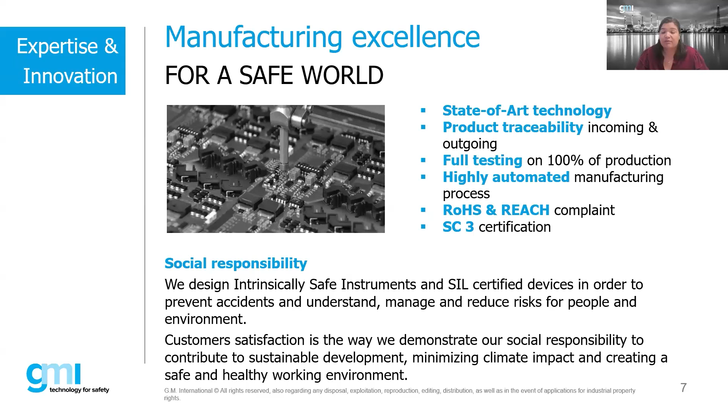We follow all the standards, like I was mentioning. We're an Italian company, so we follow the European standards, ATEX, but we are an international company, so we follow IECEx, and we are in North America, so we also follow the North American standards.

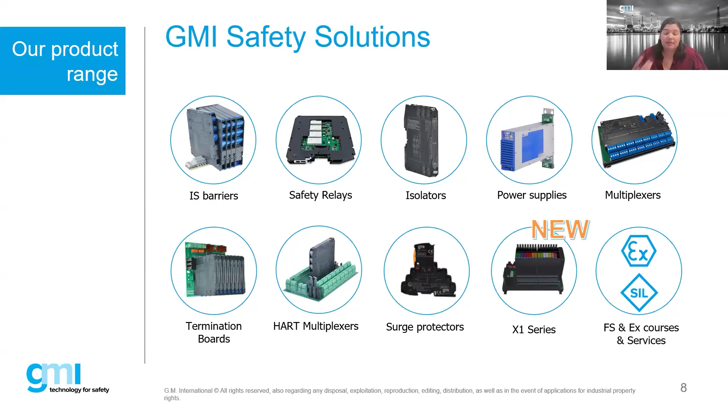We're located all over the world, so there will always be someone from the GMI team in your time zone. I know that's very important for our users, for the user experience. Some of our customers that we've had the pleasure to work with in the last 30, 40 years from the company include system vendors, EPCs, OEMs, and of course end users.

So there you go, now I pass the microphone to Bob Johnson so we can start the technical training.

Okay, well thank you Barbara, and thank you for sharing a little bit about GMI. I do want to share this on a personal note - I've known the folks from GMI for many, many years, and we also supply Ex equipment as well. One of the things I've always really enjoyed working with GMI is I can talk to pretty much anybody within the organization and they respond very quickly, and that's a nice thing. It started off as a family-owned business, and many of the original family members are still part of the organization. It's nice to actually be able to pick up the phone, talk to somebody, and get an answer. Unlike some of these other faceless, nameless large corporations, they're very easy to deal with, and getting answers is always usually very easy.

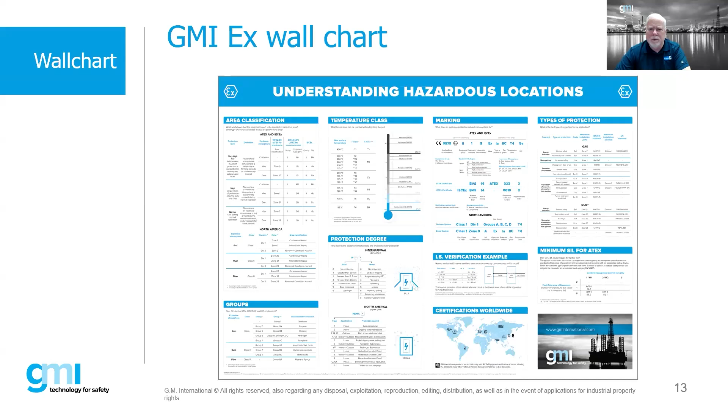So going through it a little bit, starting with area classification - this is always a question people try to figure out, which standards do we use for area classification? Within the international world, we pretty much follow the 60079-10-1 and 10-2, depending on whether it's gases or dusts. Sometimes we'll also use what's called the Energy Institute of Petroleum 15, which is an area classification document. Then in the United States and some parts of the world, we'll follow what are called American Petroleum Institute recommended practices, specifically the 500 and 505, or an NFPA document.

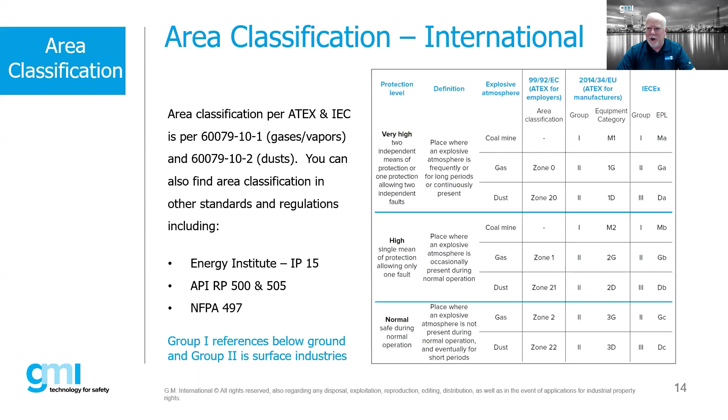Looking at this chart, when we talk about groups and zones, anything under ATEX where you see a group - group 1 is considered a mining application, group 2 is considered surface industry. Within your wall charts you'll see a definition talking about the protection concept of equipment suitable for those particular areas, either very high, high, or normal fault condition tolerant type product. We furthermore break this down into M1, M2 for mining, then surface equipment groups 1, 2, or 3, and then a G or D for gas or dust hazards.

That's kind of the ATEX marking requirements, where under IECEx we have 3 different equipment groups called EPLs, and these are considered to be either 1, 2, or 3. It's either a GA, GB, or GC, depending on the zone of use.

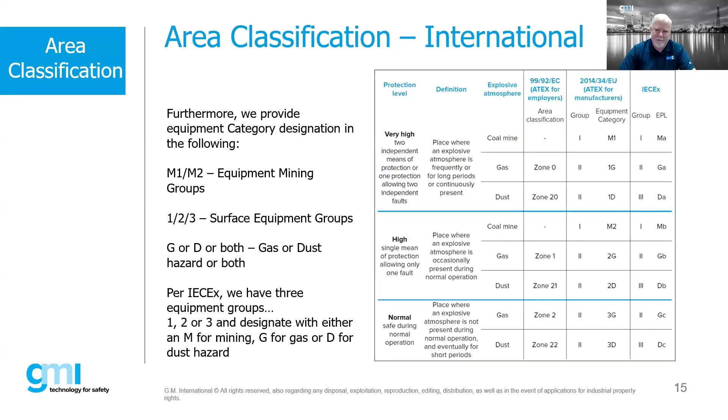Yikes. Apologize, Barbara, I might have to have you take over here a little bit if I can't get over this.

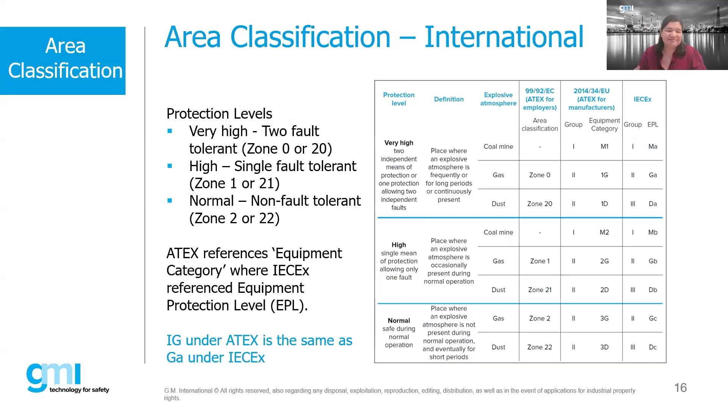Anyway, what we're going through here again, we have some additional information. ATEX will reference the equipment category, where the IECEx references equipment protection levels. So the key thing to note on this, where you see something that says ATEX category 1G, that basically means the exact same thing as GA under the IECEx scheme.

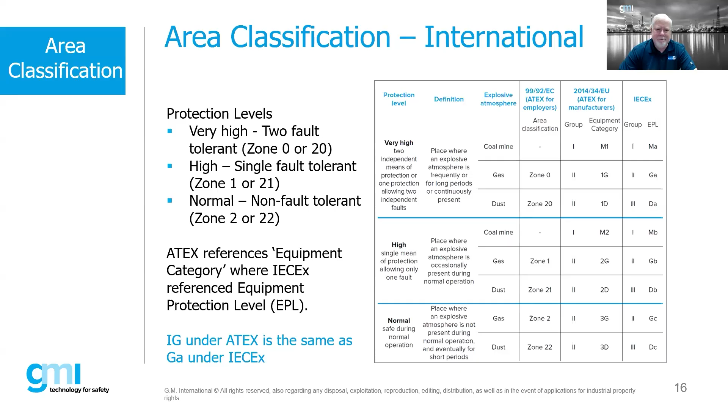Now, for division applications or North American applications, we in effect have 2 different methodologies that we can follow. In the US, the legacy was more or less defined within the National Electric Code as Section 500. For the zone concept, we use Article 505, which is the zone concept.

So in the US legacy facilities, we would have either a Division 1 or a Division 2, and we would have a class hazard. Class 1 would be gases, Class 2 would be dust, and Class 3 would be fibers. And how this kind of breaks down in comparison to the zone concept, a Division 1 area in the United States would be a combination of Zone 0 and Zone 1, where a Division 2 is very much similar to a Zone 2.

So let's do a quick poll question. This will allow me maybe to go grab a little water, and I'll be right back. Can you launch the poll? I think you have access to the poll. Well, you know what? We'll skip that, how's that?

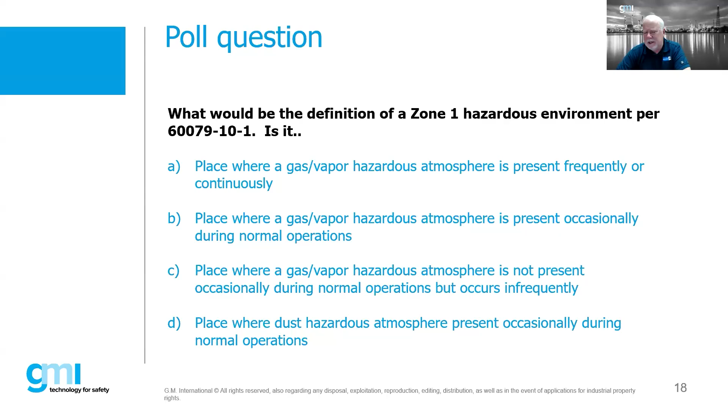The answer for this, a Zone 1 is an area in which a gas vapor hazardous atmosphere is present frequently or continuous, or in normal operation. It's not D. Where gas vapor atmosphere is not present occasionally but occurs infrequently, it's not C. B would be the correct answer: place where a gas vapor hazardous atmosphere is present occasionally during normal operations. If it's frequently or continuously, we consider that to be a Zone 0 environment.

So why do we subdivide these gases and vapors? We need to determine this based upon really a couple different things, the main factors.

Yes, sorry Bob, let me interrupt you there. We have a question that I think will be a good time to talk about it.

They're asking, may you please explain the meaning of class in North America classifications? In North America, we have Class 1 and Class 2, and Class 3, when we talk about the type of explosive atmosphere we have, right? Which will be gas, dust, or fibers. When we talk about zones, that's when we have like Zone 0, 1, 2, which is gas, 20, 21, 22, which is dust and fibers. So that's how in North America we recognize what type of explosive atmosphere we're dealing with.

This slide kind of explains a little bit about that. Class one, division one, that's a gas hazard. We would consider that either a Zone 0, Zone 1, or Zone 2. If it's a dust hazard, then we consider that a Zone 20, 21, or 22. In the IEC world, we don't segregate dust and fibers into two different classes like what we do in the US, we lump those all together, considered to be dust and fiber hazards. So in the US we've broken that out, and that's a little bit different.

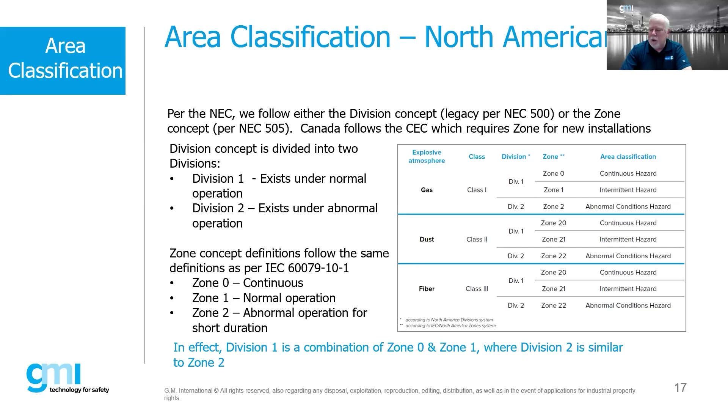But if anytime anybody mentions a class one area, I apologize, a class one area is a gas vapor environment.

So some of the gases will then get subdivided. It's important to do this because we need to understand when we get into protection concepts, what are the key criteria, depending on the protection concept, how we address these particular gases and vapors. It could be based upon the pressures, it could be based upon the minimum ignition energy, it could be based upon the temperature codes, which we'll talk about here in just a second.

So in the US, we subdivide into 4 different gas groups: A, B, C, and D. In the IEC world, we have 3 different gas groups.

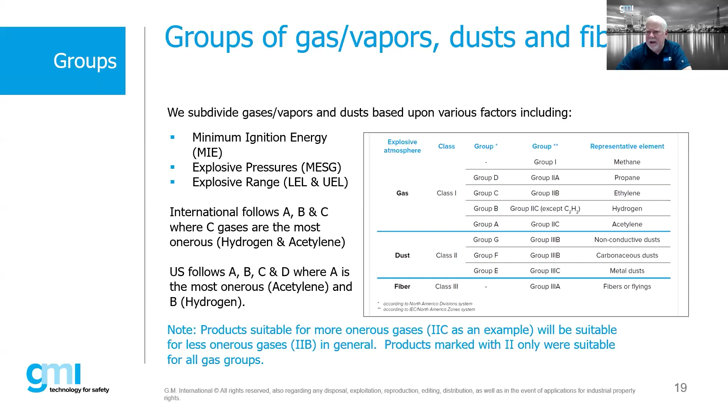So we lump hydrogen and acetylene in the same gas group in the IEC world, whereas in the NEC world we keep hydrogen separate. All the other gases and vapors you'll find in industry generally fall into either a 2B, 2A, Group C, or Group D gas. We do something similar with dusts, which we call Group 3, subdivided into 3C, 3B, or 3A. So in many cases there are a lot of similarities, we just call it something different here in the United States.

A little bit about ingress protections. We had a question come up regarding IP ratings and NEMA ratings. NEMA stands for National Electrical Manufacturers Association, and they've published a document that's been around for many years called NEMA 250.

This document basically defines ratings for enclosures, and you'll see ratings ranging anywhere from a NEMA 1 to a NEMA 13, with a whole list of different classifications.

In the international world, we talk about IEC ingress protection codes, which are based on the 60529 standard. The big difference is that NEMA ratings also include testing for corrosion resistance, whereas IP codes do not. IP codes just strictly test against either solids or liquids, where NEMA ratings also ask about the corrosion resistant characteristics of the enclosure. So that is a difference.

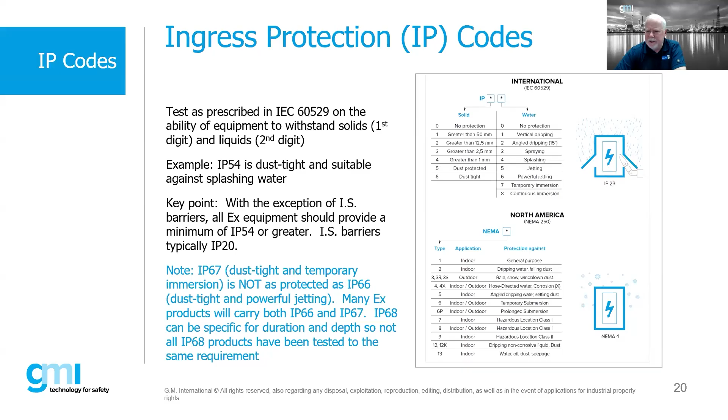The important thing to note here is some people will ask, can I just use a NEMA rated box for an international application that requires an IP rating? I would always tell them I wouldn't do that. They do overlap, but it's a different testing procedure. The same holds true in the US - if you're doing a US installation, I would use a NEMA rated enclosure as opposed to an IP rated enclosure. In many cases, enclosures from big manufacturers will have both, so just be aware that that's a requirement for enclosures.

Now, temperature codes is another area where we're slightly different on the international side versus the United States, but it's the same concept. In the international world, we have six temperature codes associated with this - what's called T1 through T6.

In the United States, under the legacy division concept, we introduced intermediate temperature codes. So in addition to maybe just a T2, we would break it down even further to maybe a T2A, T2B, and so on.

The whole concept with temperature codes is that every flammable gas or vapor will be assigned a temperature code. What that temperature code means is that if we have a product rated, for example, a T3, that means the gas will ignite at a temperature somewhere above 200 degrees C. If we have a T3 rating for a particular product, that means the relevant surface temperature on that product will never get to that point.

So we have to take into account temperature codes when selecting product. But before we select product, we have to identify the temperature codes associated with the ignition temperature of the flammable gas, to make sure from a heat standpoint that our products will never reach the point where we could have spontaneous ignition of the flammable gas.

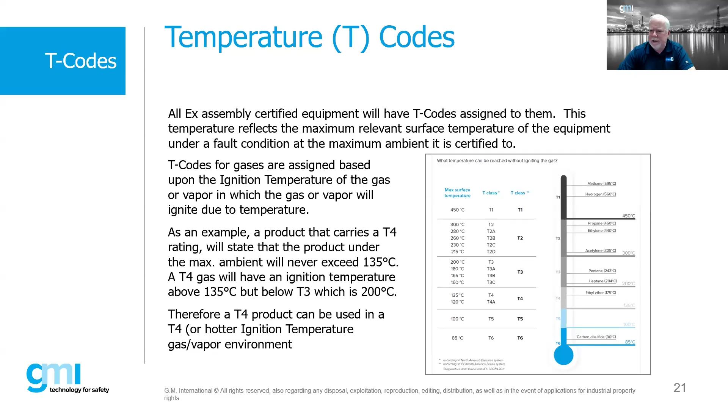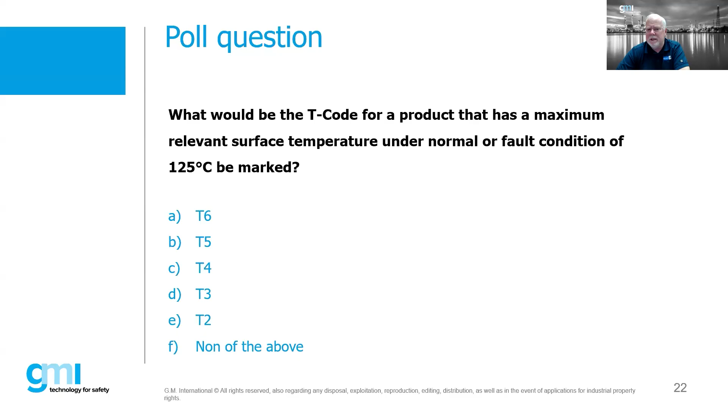So let's look at an example: a T code for a product has a maximum relevant surface temperature under normal or fault condition of 125 degrees. The T codes are T6 is 85, T5 is 100, T4 is 135. In this case, the product's relevant surface temperature is 125 degrees C, which is below 135 degrees C, the T4 rating. So we would mark this product with a T4.

So now we get into part of the wall chart where we start talking about the protection concepts and the standards and the suitability of these particular products. When we think about the protection concepts, in particular for gas applications, there's really four major concepts, and we break it down into this.

Energy limitation, like intrinsic safety, where we're limiting the amount of energy. Non-sparking, where we have no arcing or sparking, but we have to make sure on creepage and clearance distances - we'd call this increased safety. Containment, where we're taking an arcing and sparking device, putting it in a cast enclosure, containing that explosion inside so it doesn't propagate to the outside. And then finally, separation, where we're removing the gas from any potential ignition source by the use of maybe pressurization, oil immersion, and so on.

For dust, we basically talk about energy limitation, again intrinsic safety, or separation - dust ignition proof, pressurization, and others.

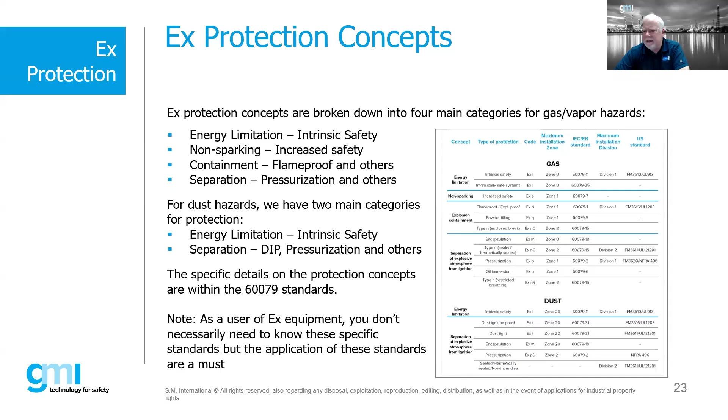So if my role is product development or product engineering, absolutely I need to understand those standards. If my role is more about applying these particular products in a design system, I don't necessarily need to know all these details, but I do need to know some of the other ones that are published.

So just as an example, we're limiting the amount of energy below the minimum ignition energy for the particular gas group. This is typically the use of intrinsic safety, and it's divided up into three ranges of fault tolerance, called EXIA, IB, and IC.

So when we looked at the wall chart where it talked about fault tolerance, the highest level of intrinsic safety is double fault tolerant, meaning we could have two separate individual faults of an intrinsically safe circuit and still be safe for use. If we have an IB circuit or an IB barrier, in an IB loop, that means we can only have a single fault, and that's only suitable for zone 1. If it's not fault tolerant, meaning there's no redundancy, then typically that's only going to be suitable for zone 2.

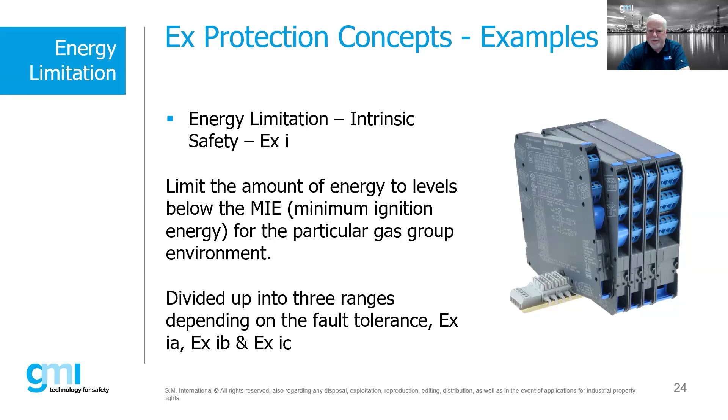Non-sparking - a good example of this is increased safety enclosures, where as long as there's no arcing or sparking taking place on the inside of this enclosure, we can assume gas vapors get on the inside, but since there's no arcing or sparking, enclosures manufactured of sheet metal, plastic, or polyester are perfectly suitable for those applications.

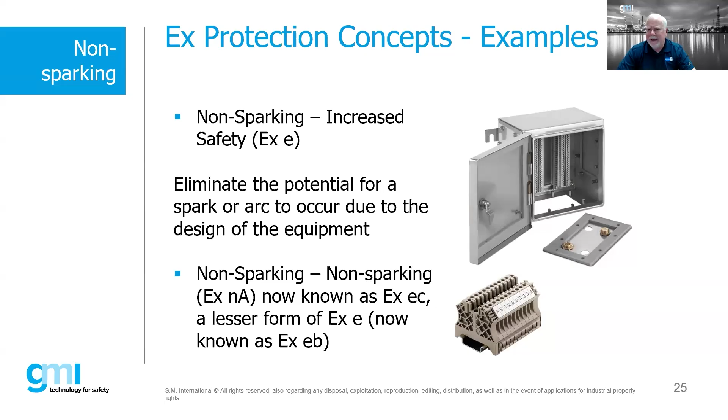So typically what we do need to do is make sure the only items we put on the inside of these enclosures are certified in and of themselves. A prime example is terminal blocks, but we could have relays, switches, different components that will all have an individual EX certificate. Depending on the manufacturer and the certificate, these can all be used inside of these enclosures. However, the important thing to note is we have to validate and make sure we don't put anything in those enclosures that isn't listed specifically within the certificate.

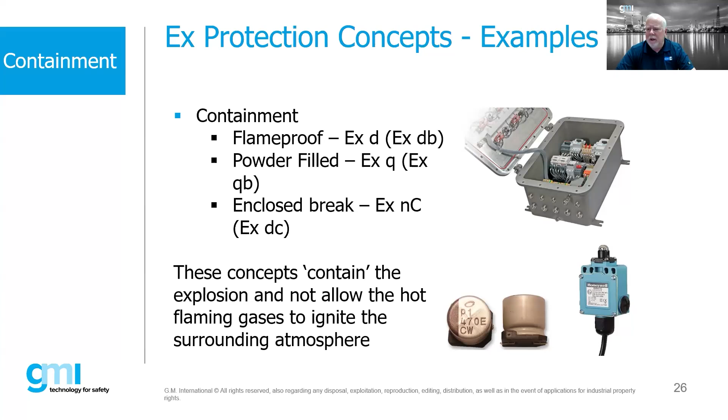Then some of the other protection concepts of containment - many people are familiar with flame-proof, but there's also what is called powder-filled and enclosed break. Powder-filled is where maybe we're taking a switching device, or a PC board, and encapsulating it with a very fine quartz powder - that's considered EXQ. Enclosed break might actually be a small switch enclosed within a housing. So that's containing the explosion and not letting it propagate to the outside atmosphere.

And then finally, our separation - we could do it in different ways. Encapsulation, where maybe we're taking a printed circuit board and encapsulating it in a resin - you might find solenoid valves as a prime example used in the industry. Hermetically sealed - some switches are actually considered hermetically sealed, they're gas tight. What's very common is pressurization, so we have different pressurization techniques for different zones.

We can also do oil immersion, where we're taking any arcing device and immersing it in an oil bath. And then finally, we have what is called restricted breathing, where we're restricting the gas-air mixture from entering the inside of either an enclosure or a light fitting or something like that. So again, we're removing the gas flammable mixture from the source of ignition.

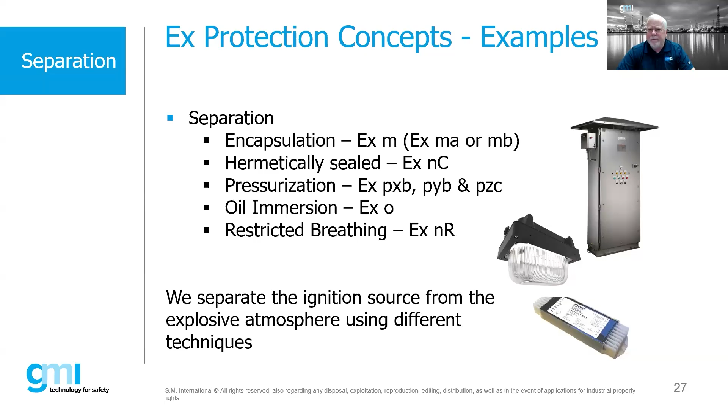Now, EX markings. This is where it always gets interesting because people see all this on labels, so we'll spend a little bit of time on this. On the wall chart, you'll see on the left-hand side the North American markings, and this is what you would typically find on a product.

You'll see something that'll say Class 1, Division 1, its gas groups, and typically a T rating as well. If it was designed specifically for a zone system in the US, we would actually call out Class 1, the zone, and put an A in front of the EX, then EXIA 2C, T4, which would be basically the same markings.

Now actually we've included the EPLs. So for the US application, we would also find at the end of that marking string what is called a GA.

Now look over on the right-hand side, you'll see in the very front the directive marking, which is the CE mark, the certification or quality product certification body in this case. The EX, the hexagon, and the EX, Roman numeral 2, telling it's for surface industry, category 1G, which is basically an environment as if it was a zone 0, and then the protection concept.

In this case, EX IA is the protection concept, intrinsic safety, the highest level. It's suitable for 2C gases, and if it's suitable for 2C, it's also good for 2B and 2A. There's our temperature code associated with it, so this product will never exceed 135 degrees C at its maximum ambient. And then finally the EPL.

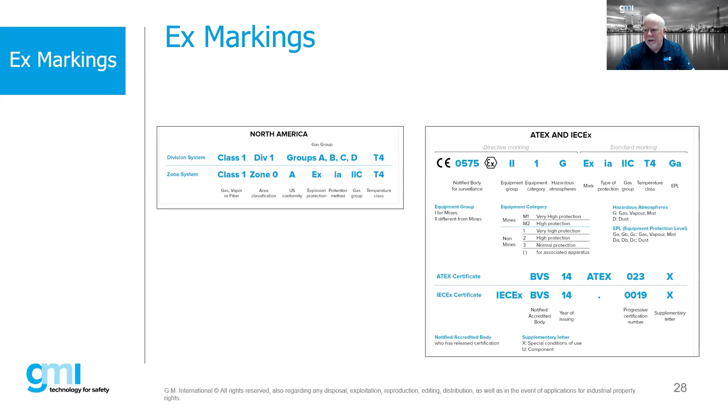I always tell people that if you're in the EX world, and again, I do inspections, I'll see a lot of products installed that are not in accordance with either the X conditions, or installed with maybe a U component. We don't want to do that. We want to make sure we select our equipment according to the standards, and we take a look at this stuff before we actually procure equipment. It's a good idea - don't buy anything unless you've had a chance to look at those certificates in a very detailed way. And we have a few questions.

Bob, maybe it's a good time here. One of the questions will be, when you have an enclosure, in what classification can you open the enclosure to do inspections in a zone 2 under power? So when the enclosure is energized in a zone 2, can you open it when it's EXI, intrinsic safety, or EXE, increased safety?

We cannot open up any enclosure while energized - now I say this, the standard does allow us to open up intrinsically safe equipment while energized without a gas-free permit. So some companies will not allow that, but you can do that as per the standard. All of the other protection concepts, we're not allowed to open them up.

If we're doing an inspection, that's called a detailed inspection, meaning that we're opening it up. That means we have to lock it out, tag it out, we have to de-energize it. And then typically, even before that, we're going to do a gas-free permit, a lockout, tag out, and all that. So generally speaking, regardless if it's zone 0, 1, or 2, we're not allowed to open up any of these enclosures or pieces of equipment while a flammable gas is there, unless we've taken some sort of special precautions.

We may have gas detectors with us. We've sniffed the air, we make sure that we're at least 25% below the lower flammable limit of whatever that gas or vapor is. We definitely want to de-energize this.

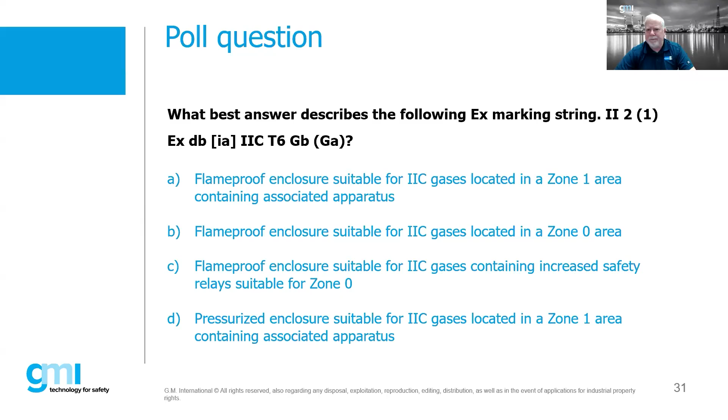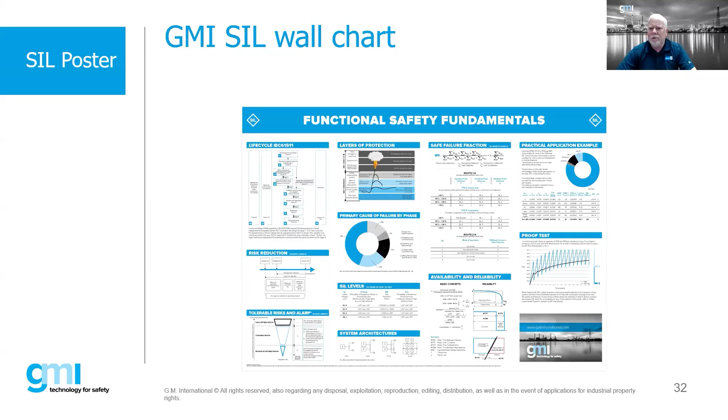Now, to finish up a bit and get into more Q&As, there's another chart available, and I know many of you probably have questions on functional safety. There's a wall chart that GMI has put out that's very helpful. I don't run into functional safety as much as I used to, but it is very helpful. This is the one chart I do have hanging up in my office, so it is a relevant tool.

Here's the thing I want to highlight: wall charts can be useful if you know how to use them. The information is right there. Take your time to quiz yourself periodically on the chart - literally read it, and then ask yourself, what does this mean? And here's the other thing: as soon as it gets published, it's generally out of date. So make sure that whatever chart you're using is updated.

Again, these do get changed quite dramatically because the standards, directives, and requirements all change. And again, we're only as strong as the weakest link, so don't let yourself be that weakest link.

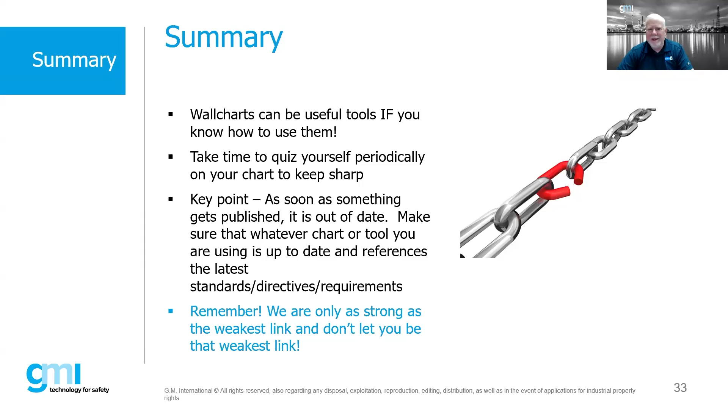So with that, we'll skip the thank you and get into some of the questions that were raised. I know we have some additional questions, so we'll go through these first.

A little bit about this: can EXI signals with blue cable color share cable tray with non-EXI signals using black color cables? Yes, you can. There's a couple different things - and by the way, there's a bit of confusion with regards to, I must always use blue cable for intrinsic safety. What the standards actually say is that if you are to use a color code to identify intrinsic safety, it shall be light blue. But that doesn't say it must be light blue - it just says if we use a color to identify it, we use light blue.

So could we use an additional or non-color identification for IS circuits? Yes, we could use tags. We could maybe use blue heat shrink. Does it have to be blue cable the entire way? Not necessarily. So there's a bit of misconception in the world that it must be blue cable, and that's not necessarily the case.

However, there are a couple things: if we have IS cables, we cannot run IS and non-IS in the same cable. We can put them in the same tray, and we don't even have to worry about separation if one or both of those cables are shielded or have some sort of mechanical armor. So if I have an IS cable that's non-shielded - although most of the time it would be shielded - and I have power cables right next to it, I don't have to worry about maintaining my separation.

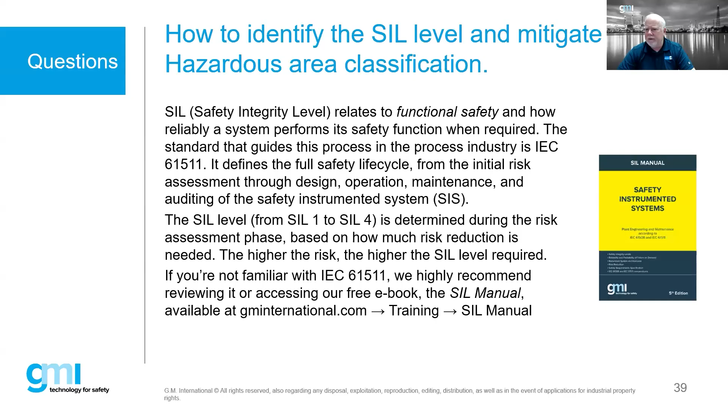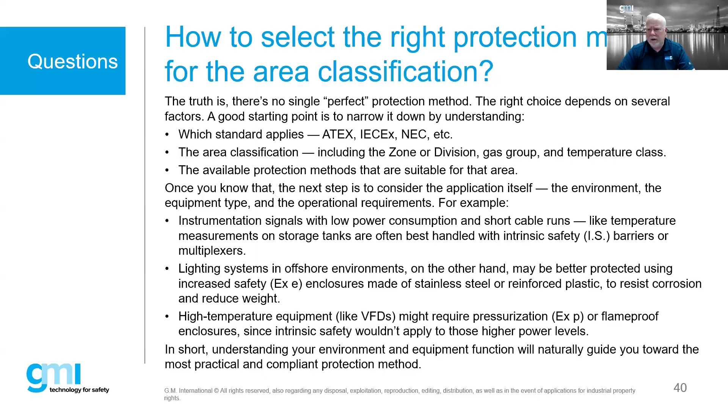So there is no necessarily one perfect method for all applications, and I think that's one of the beauty of the EX system, if you will. You have options, and if you know what your options are, sometimes you can find solutions that are very creative, maybe combining some of these protection techniques with a single product, or utilize them in such a way that it truly is safe, even safer than what it might normally be. So it takes some knowledge when designing something to understand the pros and cons of all the protection concepts and where we can and cannot use them. That's an important thing, and that's one thing we do talk about a lot within our training courses, the pros and cons of all of these protection concepts.

We talked about NEMA ratings and IP ratings, so we've already mentioned that. ATEX, IECEx, and SIL - so again, ATEX and IECEx deal with equipment used in hazardous locations. ATEX, and I think we did have a question of whether or not ATEX still applies, and it's still there.

It refers to the European Union directives and standards for equipment used in explosive atmospheres, and the harmonized standard is the EN version of the 60079. The IECEx is a certification scheme developed by the IEC, and it does use the zone classifications, and it follows the 60079, the IEC versions. The whole intent of the IECEx was to have a globally harmonized approach - that's the approach of the IECEx. ATEX is really meant more for free trade and reduced trade barriers within the European Union. So that's kind of the aim of both of those organizations, or documentation, or schemes.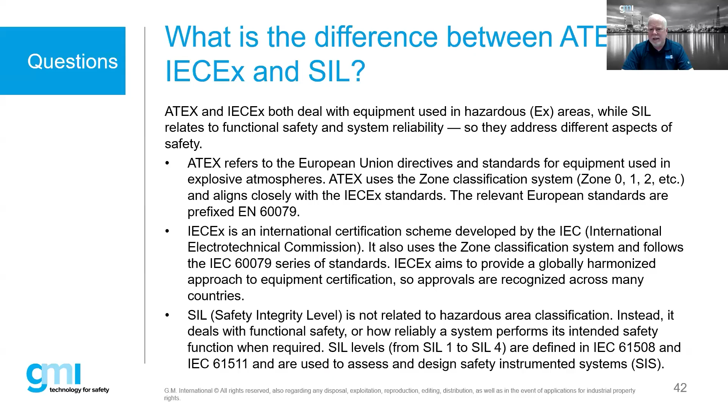And they're very similar, protection concepts are the same. SIL is not related to hazardous area classification, and again, it deals with functional safety.

For wiring methods, people always ask which wiring method should I use? Because we've talked about protection concepts, but now what do we do? Within both the US and Canada, we've adopted the zone concept, but we still follow the installation and design details for interconnection referenced in the National Electric Code or the Canadian Electric Code. They have different requirements for things like cables, cable glands, and cable connectors than what we'd find in 60079-14.

That standard, 60079-14, is the most important standard if you're doing any design work around EX. Most competency programs, when we teach them, are based upon the 14 standard. So you'll find a lot of similarities between what's done in Canada, the US, Australia, Europe, the Middle East, and various parts of the world. There's a similar concept, but they're not exact. So we always have to understand exactly what wiring regulations we're using in this particular market.

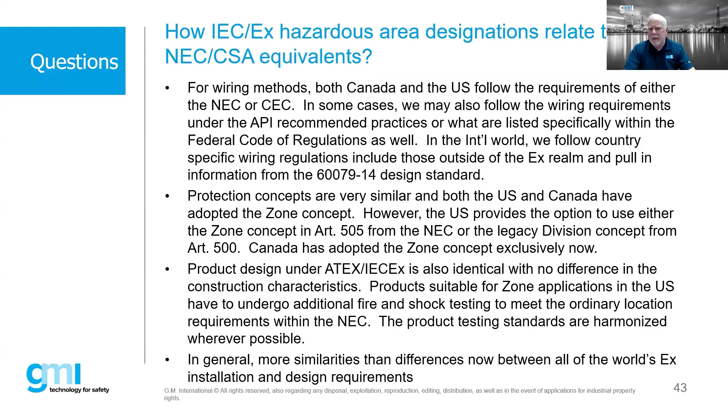What else needs to be considered when designing EX systems other than product? Obviously regulatory requirements and client wiring requirements, third-party specific requirements. We run into applications maybe in the marine or offshore business where there may be some ABS or DNV regulations. There's also the country or project specific non-hazardous wiring regulations.

There's a whole set of IEC standards, the 60364 set of standards, that deal with general wiring. In the UK, we follow BS 7671. In Australia, we follow the AS 3000. In the US, we follow the National Electric Code, and so forth.

Once we've clarified that, the basis of design will most likely follow, for hazardous locations, the key points from 60079-14, which has been adopted around the world as country-specific standards. It could be AS NZS for Australia and New Zealand, EN for Europe, NBR for Brazil, and so on.

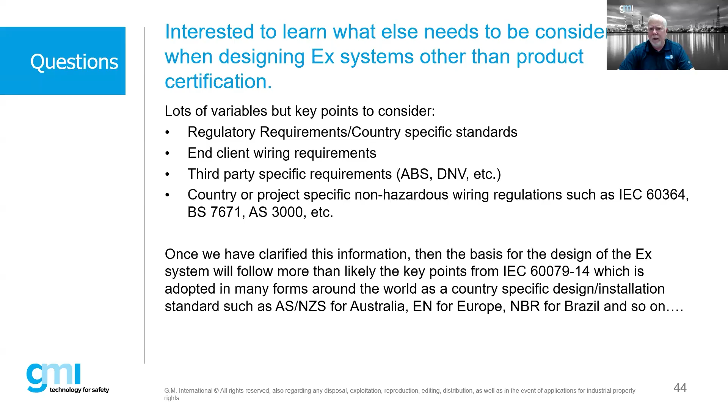This was a very interesting question. I hope this person is online because it was very interesting, at least for me being a nerd in this business. 60079-33 is a very unique standard dealing with what is called special protection, indicated by EXS.